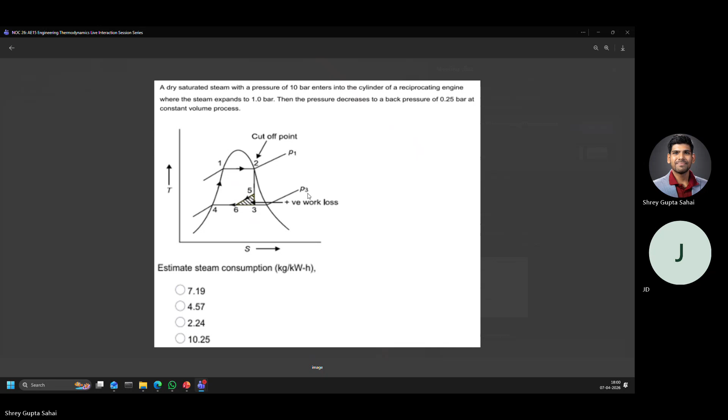Yes, please tell me what is the doubt. Actually, while estimating the steam consumption, the question says we must estimate the steam consumption ratio. Wait, wait, I can't hear you very properly, give me a second. Can you try to speak again? So my doubt is how do we calculate the steam consumption value?

Steam consumption - what is the unit here? Go ahead. The value I have given from my previous calculation is not matching with the given option, so I just wanted to see what might be the procedure and what is the value.

Okay, so let's first discuss how I would approach this problem, and then if your approach and my approach are different, let's go into specifics. Let's see what this problem is about. A dry saturated steam with a pressure of 10 bar enters into the cylinder of a reciprocating engine where the steam expands to 1 bar.

Then the pressure decreases to a back pressure of 0.25 bar at a constant volume process. So from 2 to 5, I think that's okay, let it be. So estimate steam consumption. This is the first question of a multi-part question, is it?

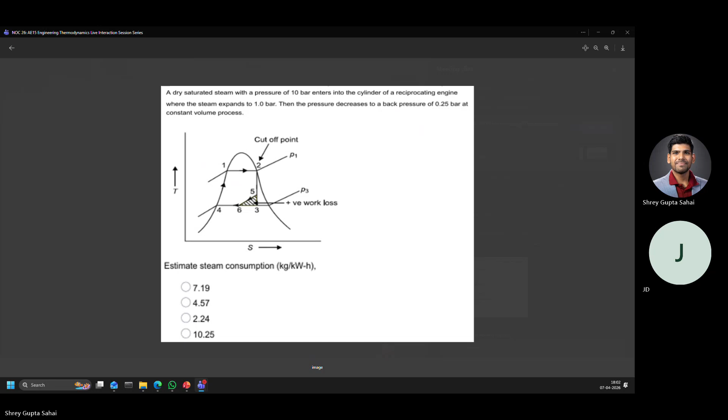Jyotirmaji? Is this a complete question? Do we need anything else? Sorry, I was muted. This is a four-part question, this is the first part. We have three more parts. Okay, maybe I can also attach the snap.

Yes, you can, but does it say anything about where 2 to 5 is the expansion process? As per my understanding, while solving, what I did is that P1 shown here, I have taken to be the isobaric 10 bar line. Then at 5 there is one point, so in the figure it's just shown like this. I assumed there's another parallel line going through 5 also between P1 and P3, so let that be P2, which is 1 bar.

And then the pressure decreases to a back pressure of 0.25 bar, so I have taken P3 to be 0.25 bar. So from 5, what is the process? It follows from 1 bar to 0.25 bar. It's basically shown that back pressure at a constant volume process, so from point 5 to point 3 we have a constant volume process.

So basically in the calculation, what I had taken is that since it's a constant volume process, the specific volume V5 is equal to V3. Just a second - the pressure decreases to a back pressure, constant volume process. Okay fine, that will make sense.

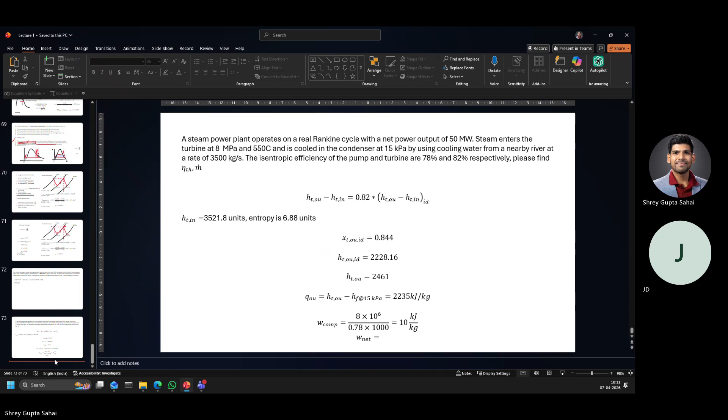There will be some positive work which will happen between 2 to 5, right? The negative work, let's say, happens between 4 to 1, right?

Where will the negative work happen? In which process is the negative work going to happen? Tell me that. Let's reduce that.

Then it should be between 4 to 1. Yes, but you have taken V5. Okay, so that is one thing.

The other thing here is, note that from 4 to 1, V will not be constant. In fact, V will be varying. Why, let's say, do we consider V to be constant generally? In Rankine cycles, we will use that formula largely, a lot of times. Why is that?

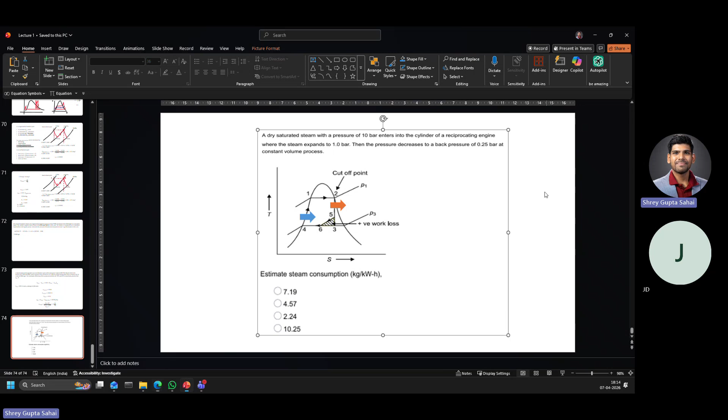Which one is the correct formula? And when is this correct? Is this always correct?

See, I know that you know most of it. So just answer, let's have a discussion rather than me telling you the entire theory because I know most of it you already know. Let's quickly pinpoint where there is a small confusion so that we can quickly resolve it. If you have confusion, then we can pinpoint it. Otherwise, if you're totally blank, I will have to tell you everything from the start. So tell me, just tell me the things that you are sure of, that you know.

So are you aware which of this is correct? Which of this is wrong, or can we write any of this expression always? Or let me confuse you even more - which one is correct? You need to tell me this. See, because this is important.

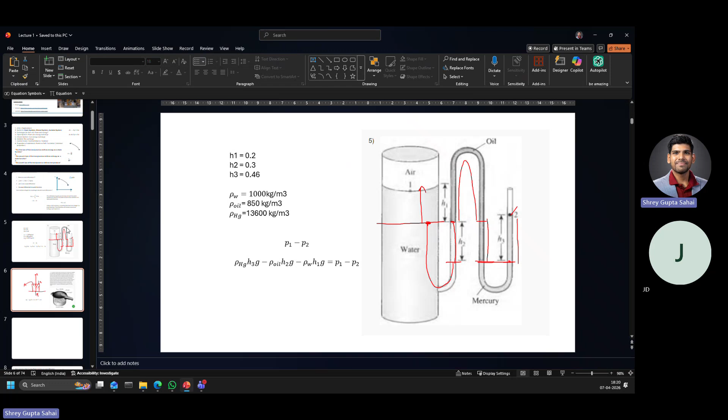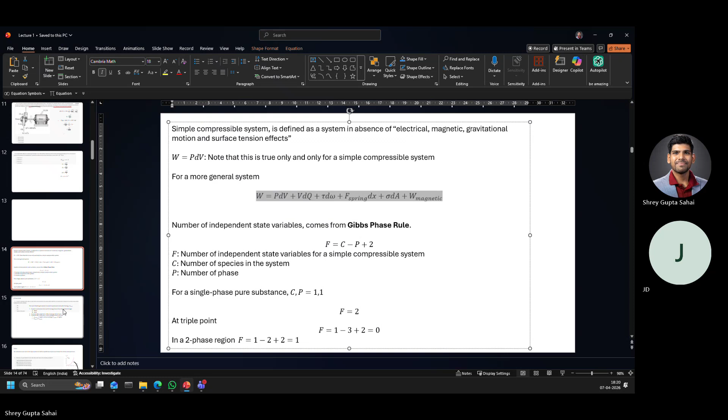Okay, so first of all, we have to realize one thing: fundamentally there can be multiple ways to look at work. Now the interesting thing, and generally when we start with it, we see boundary work done. See, this is the fundamental expression. Okay, this is important.

And actually there will also be this work. It's important for me to write this. See, this is an expression which always holds. So the expression that I'm going to write now always holds. So the boundary work that you are doing will always be PDV.

Why? Jyotirmaji, can you tell me now why boundary work is always PDV? There is no doubt in that. No matter which case you are dealing with, boundary work will always be PDV.

Why? So suppose if you have a piston cylinder arrangement, so in this case... yes, you were saying something. Yes, so because then, yes, the displacement should be there. Otherwise, without that, it will be zero. So when your system boundary moves, it has to be supported by some force, and that force in a simple compressible system will be the pressure force.

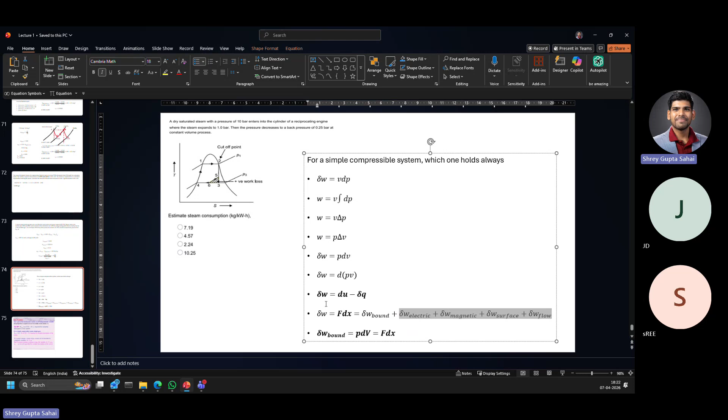And so F dx. See, actually this is the case. In some sense we can say this, not sure if this is correct, but in case of a simple compressible system where all others are zero, you know the force will be the pressure force, and dx will be the movement of your volume or the displacement of a boundary, right? So that is there, okay.

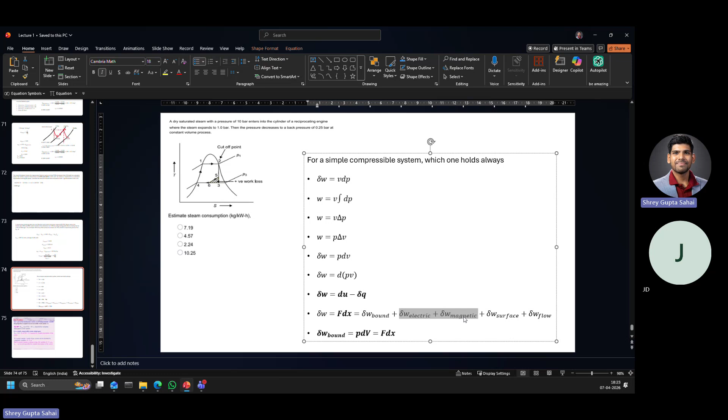That is why people get confused. When some problem comes which has magnetic and electric components, you might get confused because I'm not elaborating on these two aspects. But in the interest of time, and assuming, just hoping that these things will not pop up in your final exam, I'm just kind of removing them. So remember that I'm kind of at this point.

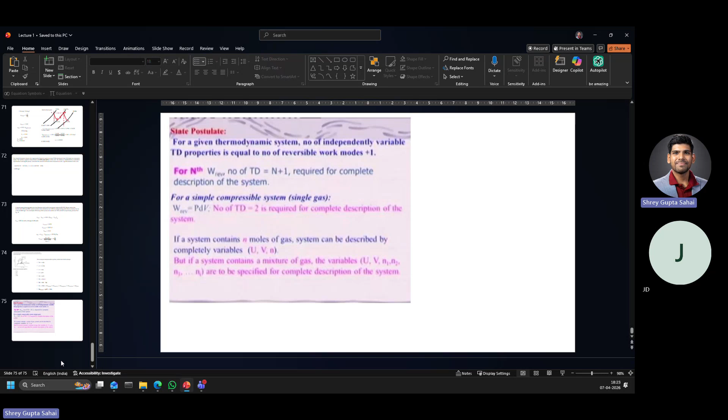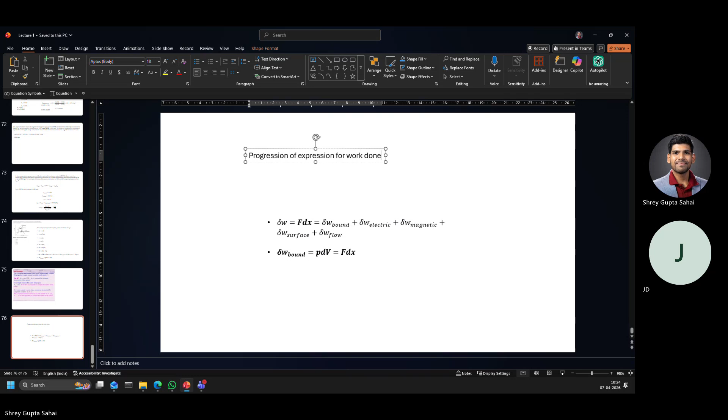Let me write this part. Wait, so we start from here. So I'm just writing the progression of expression for work. Okay, this is what we are talking about, this is the big heading. So up till now, this is for a compressible system. This will always hold.

Okay, there might be other components which we have kind of neglected right now. We have not considered other components also. There might be other things also. Maybe let me see if there are other components, maybe some concentration or something. I don't know, some other physics that can come in.

Now, the first step: neglecting or assuming no electric or magnetic work is in the process. Okay, we write this. What do we write? We write this thing.

Similarly, if there is a surface tension, we know surface tension into area, so sigma dA is delta work surface, right? So we could substitute that, or if there is no surface tension forces, if those forces are negligible, if we are dealing with large amounts of forces, then we can neglect this part. If there is no surface tension effects or phase change boundaries involved, you kind of neglect it. Okay, that is also very engineering-like, it's not always there. Surface tension, you don't deal with it too much.

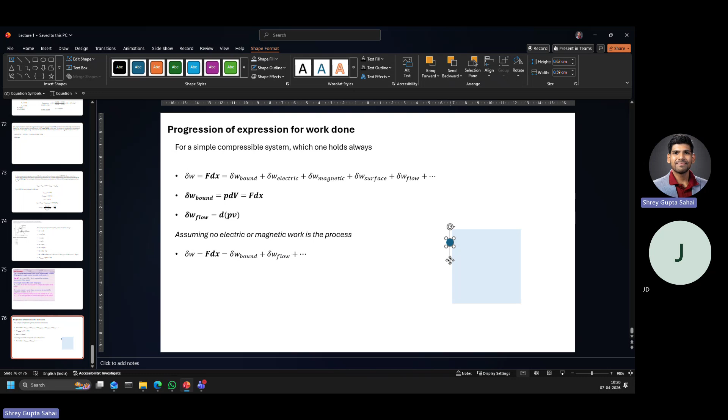What work? So now that work will be what? It has to bear the pressure force which will be applying at the point, at the boundary. Say it is here, right? It starts to enter, it will start feeling that pressure that this system has. You understand? Yes. And now once it moves, this P into this will become...

Once it moves in, actually, let me just quickly see. I also don't remember exactly how that expression comes. Wait, just give me a second. Flow work, let me recall. Flow work. Just give me a second, it will take too much time.

I remember that part. Work done, work that you do. Give me a second. Let me recall this part. So pressure is...

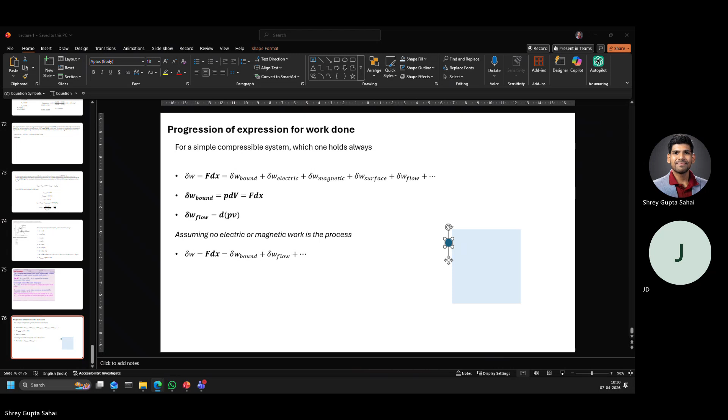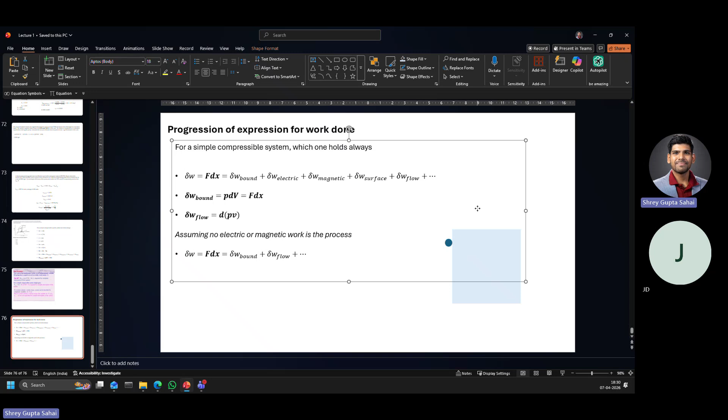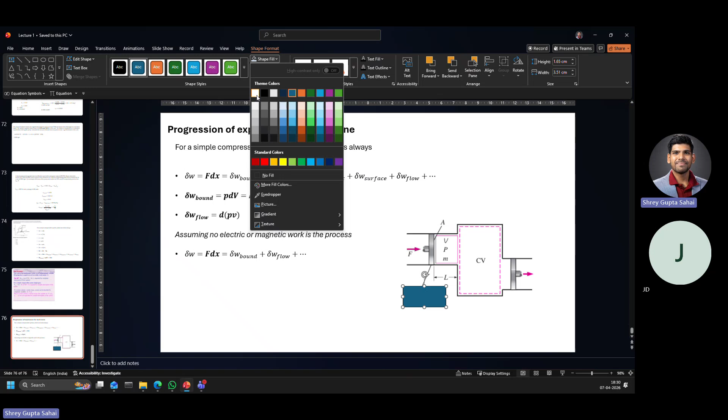Right, see, it will be applying some force. See, this is the right image to show. So basically, now it says imaginary piston and all. Just forget that part. Don't imagine any piston for now, because I don't like to use that terminology, imaginary piston or anything. And forget about this piston also. Let's ignore this piston part also.

Just assume that there is a pipe through which some mass is entering. So the cross sectional area through which this mass will enter is A, right? And say it enters with some mass. Now when it will enter, there is no irreversibility or anything. The pressure of the fluid which is entering, or the pressure of mass which is entering the system, will be equal to the pressure of the system itself. So this P and this P-CV will be the same, let's say, because you don't want any irreversibilities here, right?

We are talking about a reversible work. We don't want, right? You understand that point, right? So pressures have to be same. The reason I'm saying pressure is the same is that I don't want to bring any irreversibility into the system. Once I have any pressure difference, irreversibility will come. Non-quasi-steadiness will come, non-quasi-staticness will come.

So the force it will experience will be P, right? Now what will be the work? What will be the work done? What will be the work it requires? See, for this mass to enter this control volume or this system, it has to do some work because it is experiencing some force, and there will be a displacement. You understand that there will be a displacement? What displacement will it be? It will be L, so force into L. So that will again be F dx, right?

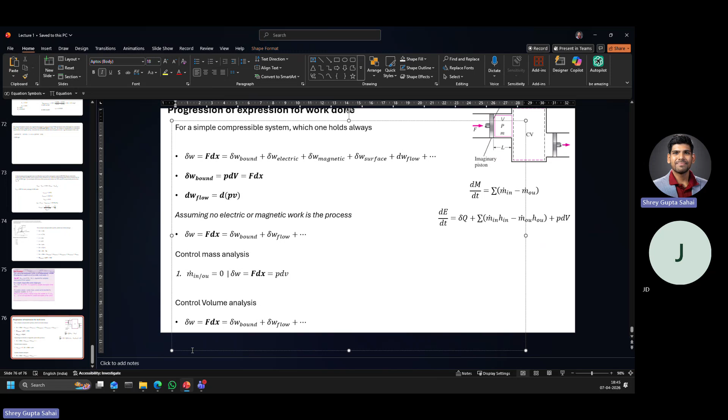In a control volume approach, if you would note, actually this holds. So there are both kinds of work in a control volume approach. It's not that in a control volume approach anything goes away. Unless I say, you understand, right? Both of the work exists generally in a control volume approach, unless I say that there is no volume, that the volume is not increasing or decreasing. Only then this thing goes away. If there is a volume increase, a volume change in the system, you will have to consider boundary work. But generally in a steady flow process, there is no volume exchange.

dV by dt will be zero. There will be no motion. So that is why that goes off. You got my point? So do I need to enforce that better? It's not this clear? This part is clear, up till now. Control mass and control volume, it's clear, right? Okay, okay.

Now let's go to the problem that you were facing here. Here, what will it be? It will be VdP. This will be V. This will be delta W boundary. Then comes another thing, delta W reversible. This is now another story. Plus W reversible. Now, where does this come from?

This comes from the TDS relationship. First of all, you need to note that TDS holds for all, like TDS is an identity. It always holds. For a simple compressible system, it will always hold, right? dH minus VdP... dU plus PdV.

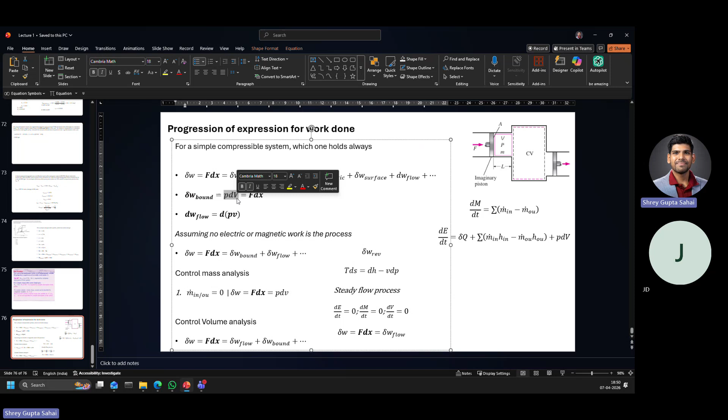dV is zero, no? So yes, boundary work is zero, because for a steady flow process, volume should not change. If volume is changing, then you are in transient conditions. Volume should not change with time. It is a constant volume process, like a constant total volume process, right? Right.

Mass can enter and exit, but volume is not changing. So that is why this boundary work goes off. So that is one thing.

Now let's substitute this thing there. We also know that for a steady flow process, this will hold. Now look at it, what is this in this case? If there are no irreversibilities, then delta Q will be TDS. Do you agree? Okay, yes, we can say that.

There is no irreversibility, right? So this is the expression we write: ds equals delta q by t. We can put an integration here, or summation. If we put summation here, then we have to put summation there also, and then you write plus S dot generation, or S generation, isn't it? Yes, we can say that.

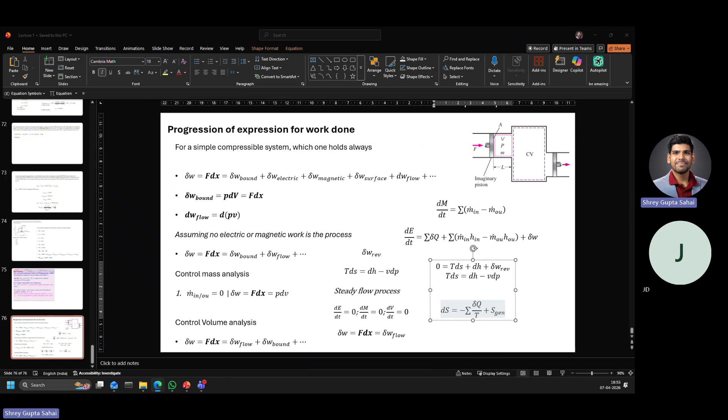So you will realize that delta reversible will actually be TDS, and this is actually minus, or what? This is minus, right? TDS equals... no, minus. Is it minus or have I forgotten? It's not minus, wait. No, it's not minus, yes wait. So this will be TDS equals DH.

Because this is H in minus H out I have written, no? So DH we consider as H out minus H in. And generally we consider this, H out minus H in. This will be minus DH. Did you understand? Okay, delta H. TDS minus TH... minus TH... TDS.

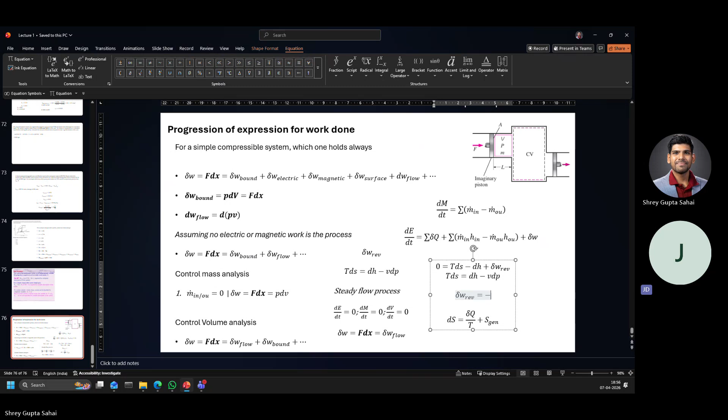Is it still confusing? No, it's okay so far. Okay, just give me a second. So far it is okay, you say. Just give me a second, one second.

See, this is also there. Minus delta W reversible. Okay, this is just a sign convention, by the way, it does not matter. So then this will become VDP.

This from just comparing these two equations, this will come. However, note that when I had written this part, this del W was work done on the system. When we define reversible work in a steady flow process in textbooks, we write work done by the system, not on the system. It is positive when work is done.

Right, so in this case, actually, it has to be minus VDP or not. Let me check. Indeed, actually, these two quantities also come, to be honest, which I kind of ignored in this case. This will also come.

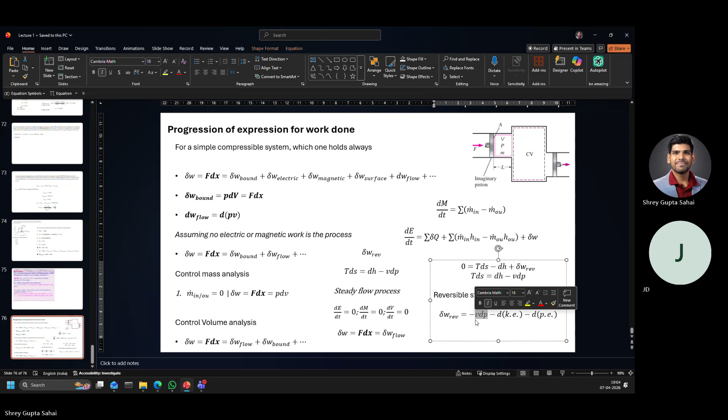So no mass exchange will happen in this case, and this is kind of a similar thing as you mentioned. This is a more general case. So this is okay, and this you cannot write - you cannot write this ever. You have to actually mention this, as we just saw.

Okay, I think this is clear now. Now let's come to the problem you asked, Jyotirmaji.

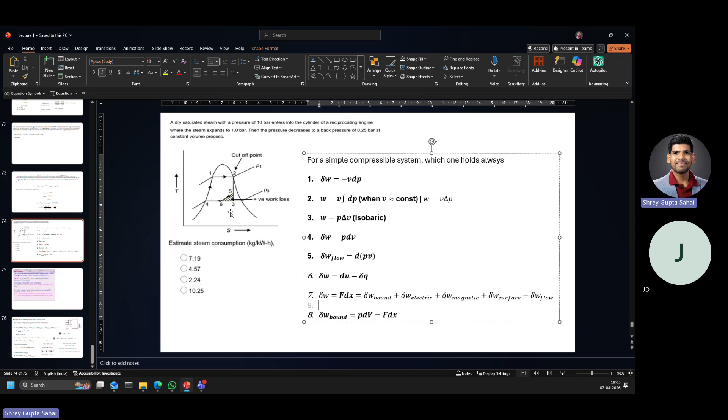Yes Reggie. Which one do you think applies to your process of 1 to 4? Okay, so 1 to 4... or let's wait, don't even bother to answer that, wait a second, you tell me. I am saying that this is a steady flow process, so all the processes on this TS diagram are steady flow first of all. So no boundary work.

Okay, now you tell me which case applies from A to B. I'm drawing A and I'm drawing B. You tell me which one will apply. And I'm also saying, see, in this case there are irreversibilities, by the way. So in this case, actually, you tell me which one, but it is an adiabatic process. Let's say I'm also saying A to B, delta Q is 0.

Okay. And it is a steady flow process - mind that it is a steady flow process. Then what is delta W? Tell me.

Well, delta Q is equal to delta U plus dW from first law. Now, so we can use equation number 6. Yes, but we actually have to use DH rather than DU. Note that, because the streams which are entering, they will carry the flow work also.

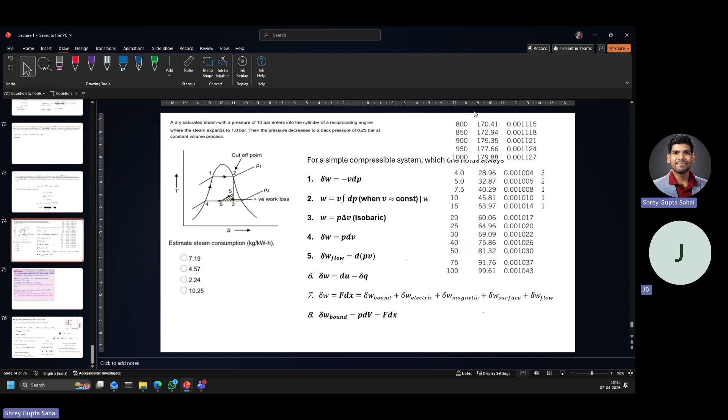But there is one thing, that the pressure decreases to a back pressure of 0.25. No, we are not talking about a constant volume process. I'm talking about 4 to 1. Okay, from 4 to 1. See, this is the general expression for a steady flow process.

Now I ask you a question. Say the process is not isentropic, and it is also not adiabatic. Even to write this, that delta W is dH, or as you mentioned, m dot into delta H, even then you need to say that the process is adiabatic. You can't neglect the heat transfer that will happen. Do you understand this part?

So you have to go from the very basics. You understand why? So from 4 to 1, what expression will I use? I will have to use delta W equals dH minus delta Q. Then I have to assume that the process is adiabatic, so delta Q becomes 0. If the problem says there is a heat transfer happening during pumping, then I have to consider that delta Q also. Then it will become dH minus delta Q, whatever heat transfer is happening, I have to subtract that from dH to find delta W, the work done during pumping.

Even during expansion in a turbine, if it's a diabatic turbine and there is heat transfer happening, if some amount of heat is leaking from the turbine, then I have to take care of it. What effect will that have? The work done by the turbine will decrease. You see here, the work done by the turbine will decrease.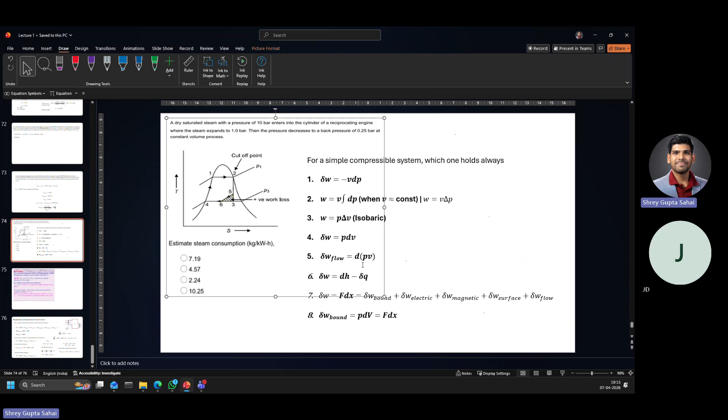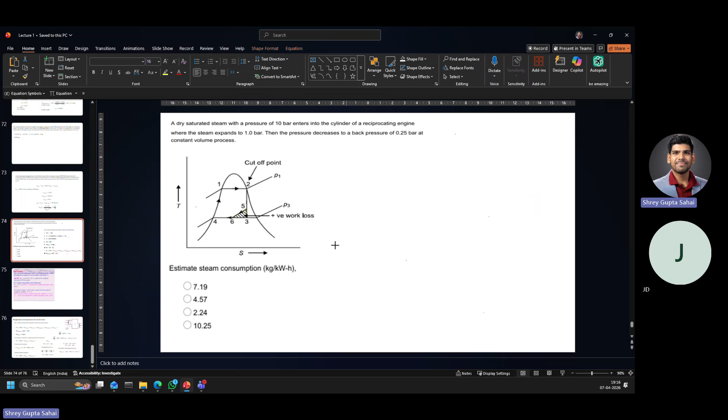Okay, so these things we have to consider. That is the only thing I wanted to emphasize. This is important for people looking at this course for the first time - you tend to get confused because it's your first time hearing this story, so you can't always connect all the dots in one go. You require going through this course multiple times, 2 or 3 times, from different perspectives, to realize that everything is connected.

So yeah, I think this is the gist of what I wanted to say. Even when you are solving for negative back pressure or no back work, you have to calculate H4, H1 minus H4, into m dot.

So that is one point, I think with this you can still do the problem. H4, H1, H4, H1. Okay, I will try it.

Now tell me other questions, what else do you have? And just one point, generally for the exam that we will have, what is the pattern?

Is there any previous year paper available? I don't think there is any previous paper available as such, at least I don't have access to one.

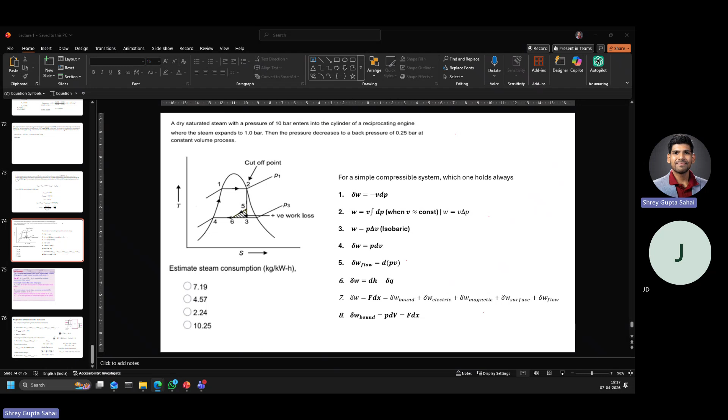It is generally supposed to be what we have been discussing, very similar to the assignments you have been doing. So mostly nothing like one question of 5 or 8 marks, not like that. But the pattern you've seen, one question will be there worth 5 marks, by way of five different multiple choice sub-questions, and they might all be connected.

So like this question, right? Just like this question, but it will be MCQ type questions only, no written question like that. I don't think so, yes.

If you have any other questions, we can discuss that also. There was just one more question, maybe I will share, this is regarding...

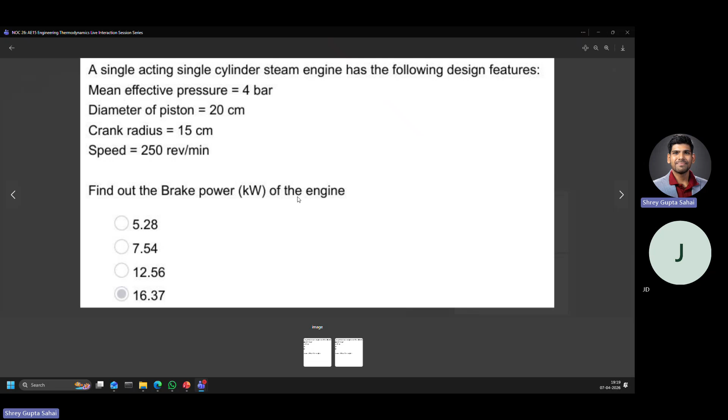So I have... sorry, it has gone twice. Oh, no problem, okay. A single acting... yeah, you're saying something.

So which formula should I apply? If you can please. Okay, the correct answer is which one?

Well, in this case, the correct answer is 12.56. Okay, what did you use?

So basically, it would be running at some torque, yes, it will be running at some rotational speed. We have to apply that torque so that whatever energy is being saved in the piston or in the moving disc, that entire energy has to be dissipated. Now what is that energy? That energy is essentially torque into speed, rotational speed.

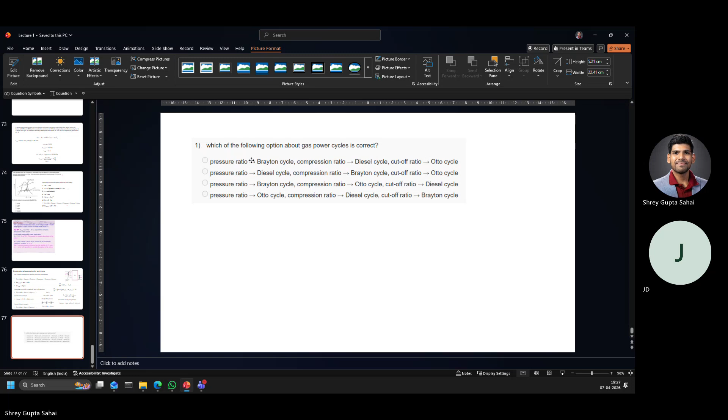So tell me this one. Pressure ratio, okay. Cutoff ratio, cutoff ratio, cutoff ratio. Just a second, Diesel, okay. Compression ratio is the cutoff? Compression ratio is...

Cutoff, Diesel. Return pressure ratio. I think number one part C or number three should be okay. Wait, number three you're saying, is it? Yes, pressure ratio is Brayton cycle, compression ratio is Otto, and cutoff ratio should be Diesel. Wait, cutoff is... Yes, that's correct, that's correct.

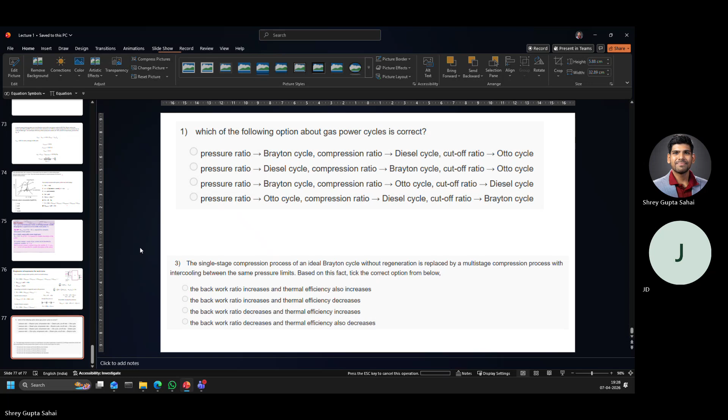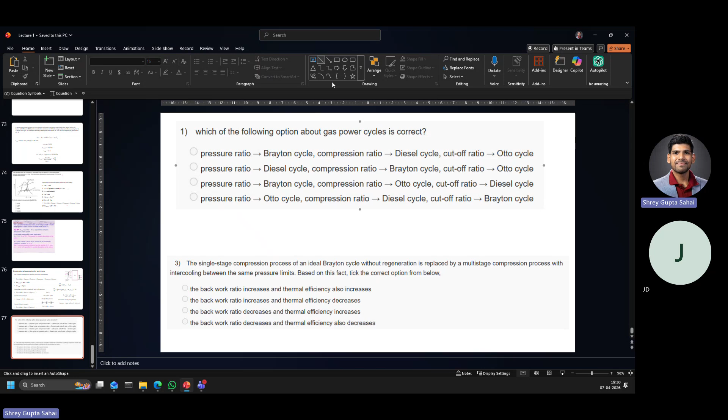Then what, then maybe. Don't guess. If you know how to do it, then we can discuss this one. Actually not clear to me, number three. Okay, see, when you do intercooling, no, multi-stage intercooling. Okay, let's discuss this and then maybe we can try to close.

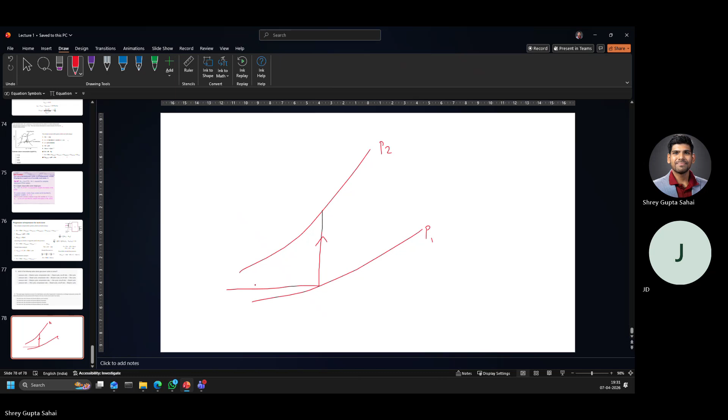Suppose, see, there are two ways to reach, and this is essentially... say you isentropically reach from P1 to P2. That is one way to do it, right? You're compressing. But you can take another approach - you can go this way and still compress the fluid, isn't it? Yes, P2 is increasing. And if you have done that exercise, it's a very well established exercise.

The minimum reversible work done during compression is through an isothermal process. Do you recall? Yes, maybe. And that is why intercooling is done - intercooling kind of mimics that. So what will happen in intercooling? Something of this sort will happen: you will go up, cool to intermediate pressure, then come down, then compress, then come down, and so on.

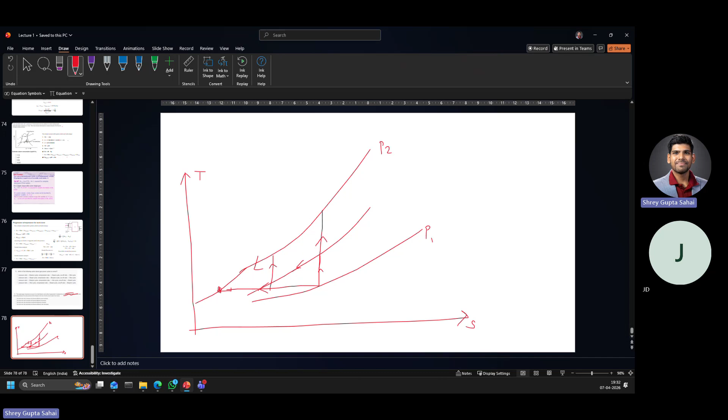So basically the idea is that during multi-stage compression with intercooling, you're reducing the temperature over which the compression happens. The net temperature rise is lower, and because of this you're decreasing the amount of work done during compression, so your compression work decreases, so your back work ratio actually decreases and your thermal efficiency increases.

Okay, also decreases - wait, decreases, thermal efficiency should increase, man. Wait, what is this? Check, because this portal says thermal efficiency should also decrease. As far as I know it should increase, but let's see.

As I wait, let me also check. Thermal efficiency decreases... okay, thermal efficiency will decrease. Let me pull up that part. I was also not clear on this. Thermal efficiency decreases, it seems, which is correct.

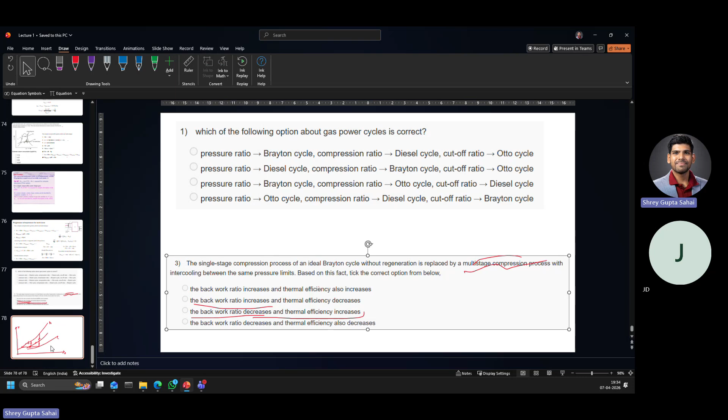So back work ratio will decrease, because compression work is going to decrease. So will thermal efficiency also decrease? Yes, thermal efficiency will decrease, because you are increasing the heat rejection to the ambient.

Okay, so you see here, if it would have been like this, you can kind of visualize why work delta H, like H2 minus H1 plus H4 minus H3, is lower than H1 minus whatever HX or HY is. This is a much higher thing. But you see that Q out increases for the same, right?

And for an ideal gas, yes, Q out increases. So because Q out is increasing, and if we calculate the increase in work done, it's not that much, so it can actually affect the efficiency for an ideal gas.

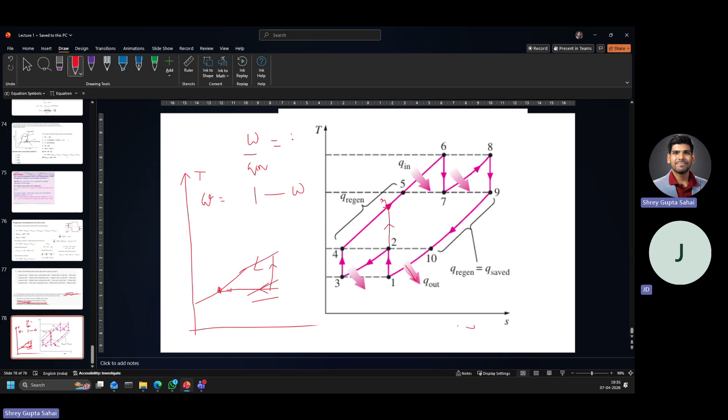So this is the relation, right? W by Q in, isn't it? Or maybe it's Q out upon Q in. Yes, Q out by Q in. So now you see that Q in remains the same, it's not changing, but Q out is increasing. So thermal efficiency will decrease.

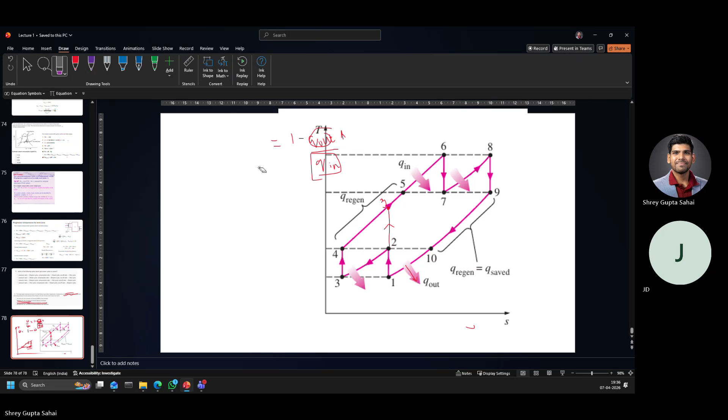Q in is the same, but Q out is increasing. That is why thermal efficiency decreases.

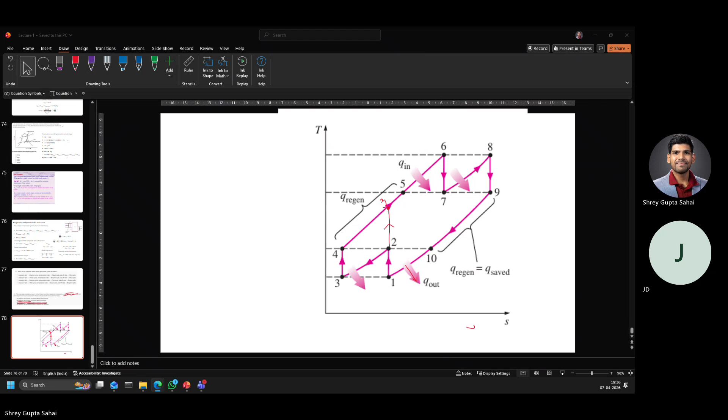Okay, let me see if we can do one more question or should we close? Okay, we can look at this question and then just close. Can you tell me this one?

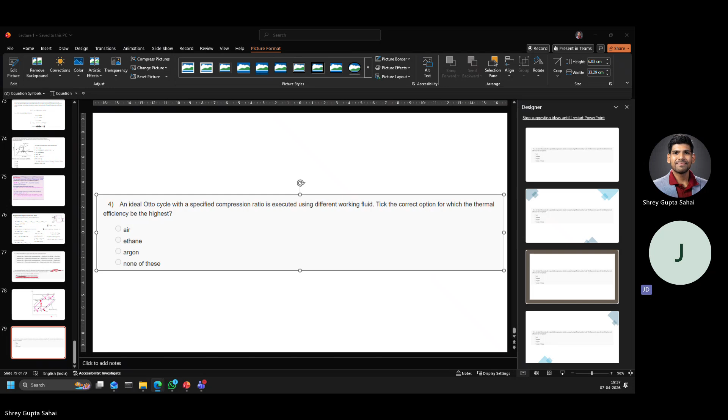Ideal Otto cycle with a specified compression ratio is executed using different working fluids. Tick the correct option for which the thermal efficiency will be highest. So pull up the expression for thermal efficiency of an Otto engine from the book. For the Otto engine, thermal efficiency is simply 1 minus 1 upon compression ratio to the power gamma minus 1.

So it depends on the compression ratio, which is the ratio of V1 by... so it seems to be independent of the working medium. Is it? What are... look at it, gamma. No, no, no.

Yes, compression ratio. 1 minus 1 by compression ratio to the power gamma minus 1. Okay, so the gamma value we have to check here.

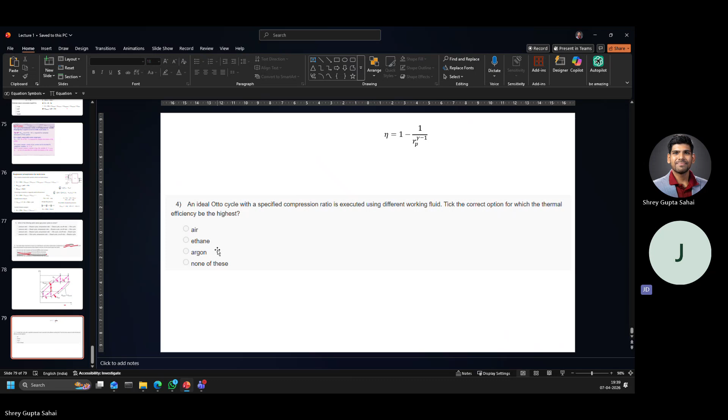So it turns out the gamma value of argon is the highest. Because gamma value of argon is the highest, this denominator will be the highest for argon, so this negative term will be the least, and thermal efficiency will be highest for argon. Okay, it means we have to check the value of gamma.

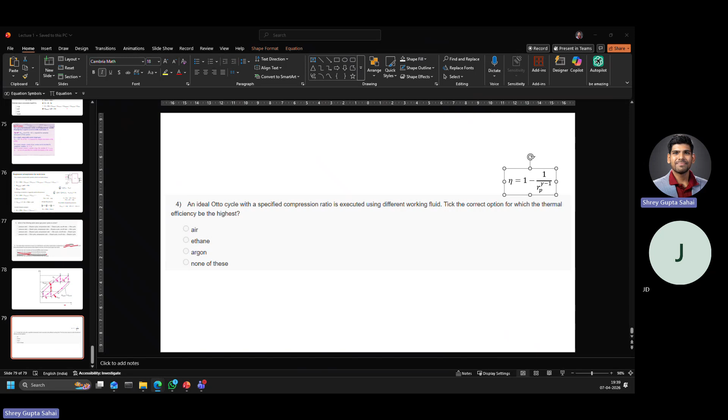It is not given in this example, but generally I don't think someone would expect people to remember the gamma values of these gases. In the exam, maybe it will be given or something.